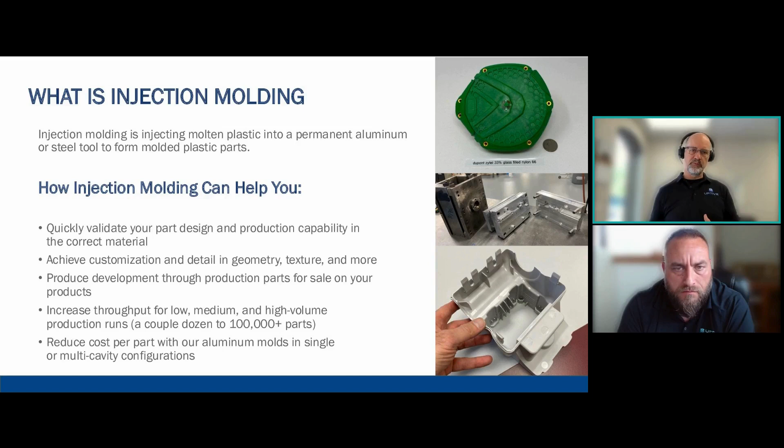But if you do a little bit of investment in tools, like I said, with slides, lifters, multiple cavities, you can help reduce part costs substantially. And we do that very, very often. All right, cool. Any questions? Remember to type those in the chat before we move on. If not, then we'll hop into this next slide.

So this next slide gives some definition of our meaning of these different types of tools. We have rapid injection tooling, what's called bridge tooling, and production tooling. The point of this slide is to show that there's a blurry line between them, and you may use what was considered a rapid injection tool on the left for your production tooling on the right. But there are some differences to consider, and just so that we set the tone on what the terms are, rapid injection tooling is typically a 2 to 5 week lead time.

That range depends really on the complexity of your part, the size of your part, how many cavities we're making in the tool, what kind of materials, what kind of mold base we're making for you. Some of those variables can affect that lead time to give that pretty substantial range. But we are focused on speed, and we're focused on parts that can be quite complex. So in the rapid injection tool, we're going to be using aluminum typically.

On the rapid side, we may use hand-loaded inserts for undercuts versus fully engineered. We may make a single cavity instead of multiple cavity. We may use simple gates instead of, say, a hot drop into the tool. We may use EDM to create texture instead of sending it out to Moldtech and having the Moldtech 11030 or what have you applied to it.

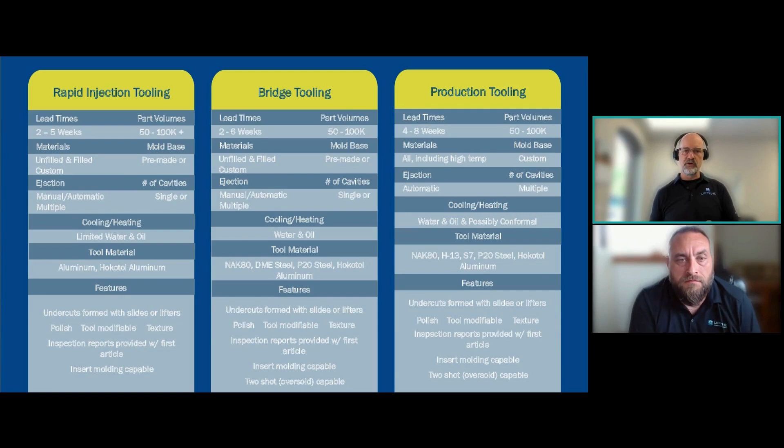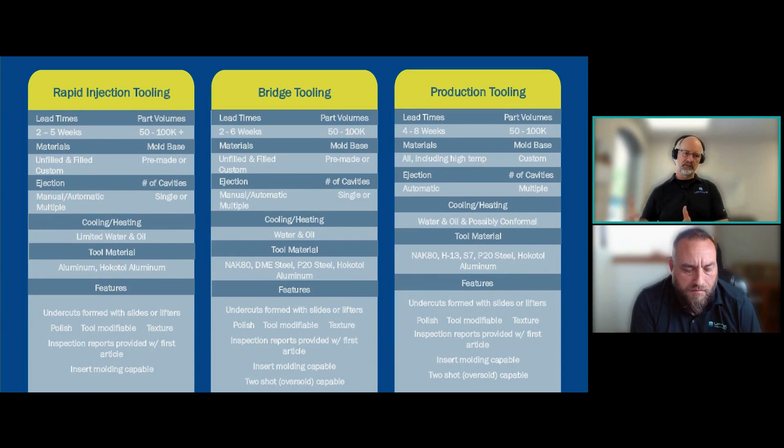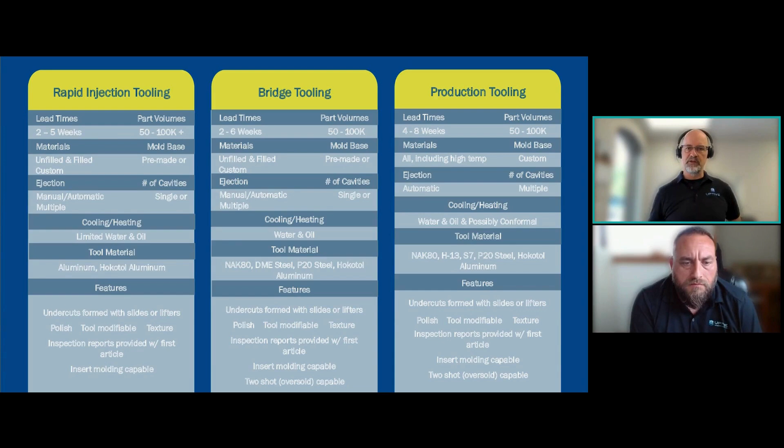We start to also then enter into the steels. And of course, we're going to go into plating and so on. We may plate a tool to give it a longer life, with some other features that we could add to make this more capable of higher volume. And then into production, that is also potentially going to be aluminum tooling. But by here, we definitely are plating the tool. We definitely are automating. We're usually multiple cavity. We may have some more things like subgates that help reduce cost as we're molding parts and reduce our need for human overseeing of the molding process. So it's a little more automated. We can take care of you for this entire process, and we can go through the options with you early on.

Okay, next slide. So what to expect from rapid injection tools? When we say accelerated design and validation, like when I introduced myself, we're here to talk over your part design and part concerns, and we're real time where if you send over questions, concerns or pictures, we can review that. We can have one-on-one Teams meetings to talk through your part to get to a good moldable part moving forward. So that's one thing we definitely offer.

The cost efficiency with aluminum tooling, Jesse hit on it a little bit as well. When we're talking cooling and things like that with aluminum tooling, we can actually run aluminum tooling a little bit faster because of the thermal conductivity of aluminum versus steel. So that is where the cost efficiency with aluminum comes into play with our tooling. The flexibility in material selection: we can run several different materials in aluminum tooling, all the way up to 50% glass-filled nylons.

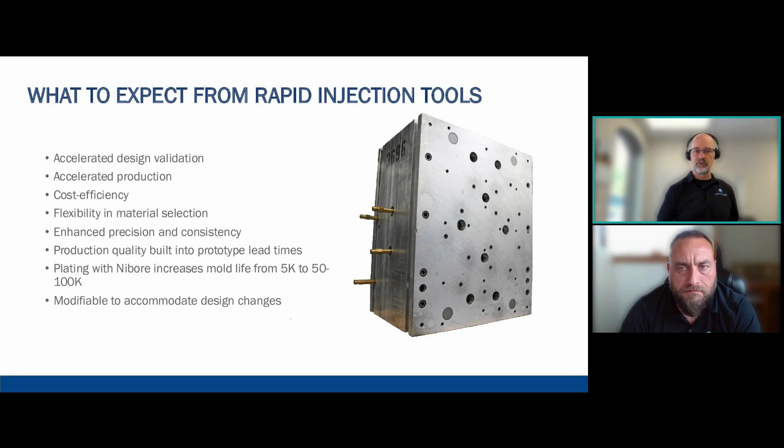You do not have to make a new injection tool unless it's economically better, because there's such big changes that it just makes sense to remake certain components of the tool. But this is something that's very modifiable. And we work with you very closely to help make sure that that's all done smoothly and as fast and as inexpensively as possible. So being adaptable helps you not be as locked into something that you can't use if you need to make changes. So that's really, really important. This material is very modifiable, and our team is very expert at dealing with that.

We have some bullet points here on some differentiators, or things that you may have experienced in the past that are limitations, or maybe even current limitations to your injection molding process. So we just wanted to go through those so that you know what to expect from us and what sorts of alleviation we may have for some of your pain points. So we just talked about transitioning from 3D into injection molding, or even just dialing in your injection molded part. You're not sure about draft. You're not sure about radii in a corner. You're not sure about thickness of ribs and if you're going to see sink marks and that sort of thing.

Getting rapid feedback on your part design, or design for manufacturability, that's what DFM stands for, with, say, where we're going to put the parting line, where we're going to put the gates, which is where plastic flows into the mold. And then ejection is where the parts, they're little aluminum rods that push the parts out. Sometimes they're blades, and there's lots of different ways to do it, where we're going to put those features so that we make sure that they don't interfere with the cosmetics of your part or with the function of your part. Having an interactive discussion about how we're going to do that is really important, and that DFM will help us all succeed. We want to make you good parts, and having some good, quick analysis of your parts will help us make you good injection tools. So DFM is critical.

That's for both the tool components and then your parts. So those first 2 points are on the tool and then the parts themselves, including mold flow, which is an available service. We can do a light mold flow included in your quote, and more significant mold flow if you're, say, going to be looking at a more complex part design, maybe multiple gates in a part. Some other cases where having a more complex and thorough mold flow is a little bit more important. We use Moldex 3D as a mold flow tool, so we can present that to you, feed it back to you so that you can have that for your project files.

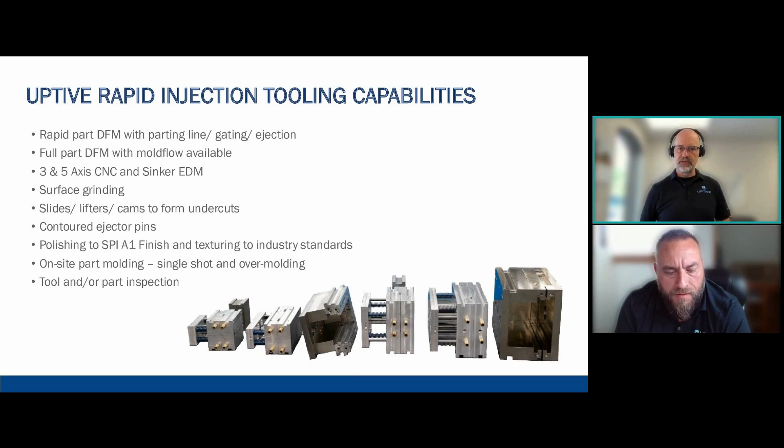And then a full tool and/or part inspection. So if you want to know the dimensions on the tool to make sure the shrink rate is right, and any kinds of features that you're looking to dial in, we can actually measure the tool, and then also, of course, the part. And we will provide inspection reports. We do simple inspection reports in-house. We also work with an outside metrology company if you want to do CPK studies or any of the PPAP up to level 3. We do that externally so that you have an independent metrology source.

Okay, if there aren't any questions, then let's move on to the next slide. And this one, I think, Justin, were you going to speak on this one? I think both of us were going to kind of walk through it. Yep, great.

So how to attain high quality and fast turnaround? First thing is get us involved early and often. As I mentioned earlier, getting us involved in the prototype stage is very helpful. That allows us to get some eyes on this, work with Justin and our tool designers to start to really give you good feedback. So having that early is great. That will help us with designs that are, say, uniform wall thickness and optimized geometries. So you may not know exactly how thick to make those ribs so that you don't get sink. You may not know yet if we can make a feature, if there's enough room to operate a slider, lifter, that sort of thing. We will consult with you early and often to help get through that so that your geometries are optimized, so that we help make you fast tools with very high quality and low cost.

Prioritize materials for quick turn processes. So that is, prioritizing aluminum where that makes sense. Maybe looking at the right molded materials, which we'll talk through the available materials that may come up there. So we can kind of work through like, hey, you're intending to use one kind of material. We can't get it quickly enough, or you can't get it from your production supplier. We may have some alternatives that we can kind of work through very quickly. So part material is a really important part of the whole analysis of how to get you speed and quality. And then that DFM analysis that we talked about, doing that up front, doing that early is very important. We'll help you through that.

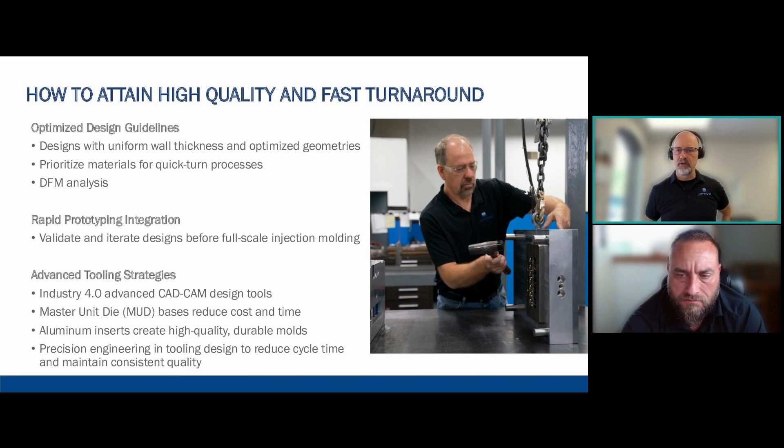I'm holding up a larger part here that we molded. That's an armrest. We have a large lacrosse basket, very complex, with some features that required high pressure to get the plastic to fill through those ribs on the side, for example. So we can make large parts and then down into smaller parts with good clarity. We've got an overmold here. I don't know how well you can see with the blurred background, my apologies, but there's good capability for parts that are clear, and parts that have complex overmold, which require a lot of shot pressure and a lot of care. So there's good capability with part size through our facility. Hopefully that answered that question.

So next, another poll is coming up. Just a quick time check, we've got about 17 minutes left. Have you used aluminum tooling limited to prototype and product development? We've got yes, no, and considering for an upcoming project. We want to address this question of, can aluminum do what I need? Can I take advantage of that fast lead time, low tooling cost and good part cost with aluminum? And can it help carry me from early development up through production? That's the intent of this question, so that we make sure we're addressing your needs. Give that a few seconds.

Okay. Talking about what type of aluminum we use here at Phoenix, what we use is called Hokotol aluminum. We've used a lot of 7075 in the past, but we have now moved everything over to Hokotol aluminum. Part of the benefit is that with lower grades of aluminum, on your thicker blocks like 7075, the center of the block is softer when they're rolled. Most of your detail is going to be in the center of the block when we're cutting it, and we don't want that to be soft. What we found with Hokotol is that it maintains a consistent hardness throughout the block. It helps not only with machining and durability, but it is also more consistent when polishing.

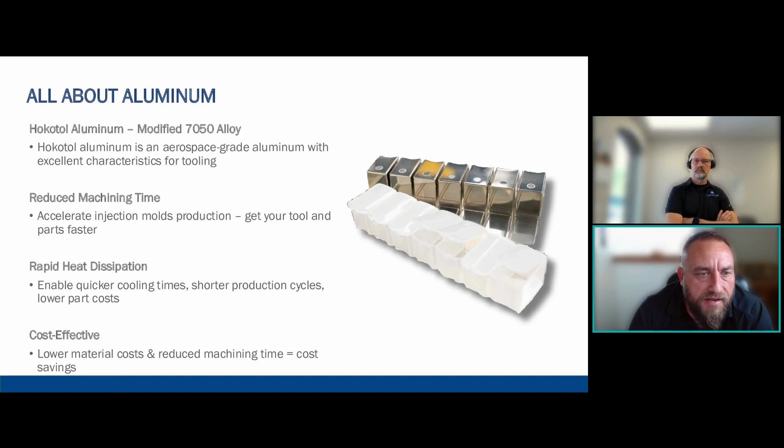Also, the cost effectiveness of aluminum versus steel, and the machine time. Aluminum is much cheaper than steel, obviously, to purchase. And then there's the time savings of not waiting on hardening the steel, where with aluminum, we can literally be cutting your detail from the time we get a PO. There's been times where, if we get a PO in the morning from a customer, we're cutting detail potentially that afternoon or the next day. So that is a huge advantage that we have with aluminum versus steel.

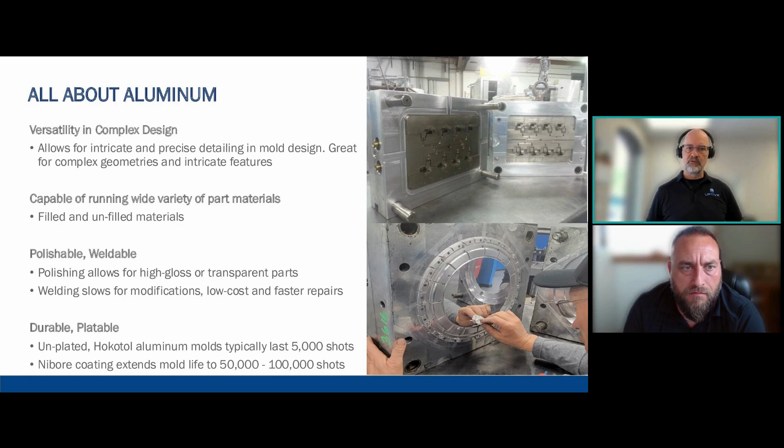All right, next slide. We're nearing the end here. With time, we've got about 10 minutes left. So we wanted to address materials. This is an important part of some of the early advantages that we talked about, being able to run parts in your correct materials.

Then very importantly, we can mold your materials. So if you have a high volume production supplier or a previously color compounded material that you want to provide to us to mold your parts, we're happy to take that and mold that with you. We just quote the parts without the material cost included.

We can also find and attain, sometimes small, depending on what you're needing, sometimes larger quantities of material that's custom for a project. So you may not have it, but you need to spec it. We have very good distributors that we can get material in within a couple of days. Often, if you're talking a tool design and manufacturing done in 2 weeks, trying to get the material can easily outstrip that time. So we're on it early. We'll help you with the logistics. We'll help you get the material selected, either through a combination of our own materials that we might suggest to you if you're not sure, or help you find the material that you need quickly.

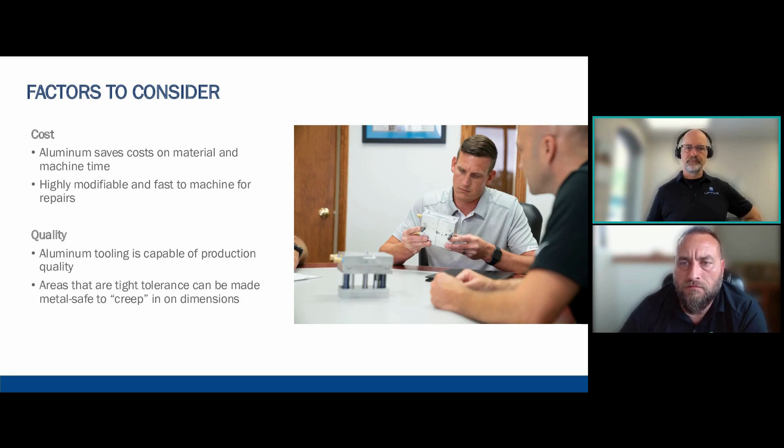Next slide. That is near the end here. We wanted to spend about the last 5 minutes going through questions. I have a few sample parts that I can show that show things like clarity. We can do inserts, that sort of thing. So I'll show those. If you have any questions that we haven't addressed so far, please type it in the chat and then we can address them as we go. We'll give a few seconds there.

All right. And then as you're considering questions that you have, I'll show you some of the samples that I wanted to address so that you can see some of the capabilities that we have. This part is a molded polypropylene part that's very complex geometry, has holes in the ends, which are kind of hard to see in a virtual meeting, but there's holes in the ends that require slides. So complex shape, difficult geometry, tricky material to mold, a 30% glass-filled polypropylene polyethylene combination.

Then this part I showed briefly earlier in the presentation. I'll kind of step aside so you might be able to see it better. This is a housing that has a clear window with an elastomeric overmold. The two-shot is something we're very capable with and can help address. Sometimes engineers have questions on how do I engineer this part so that the overmold works well, it flows well, it sticks to the substrate material. This is something that we can help guide you through.